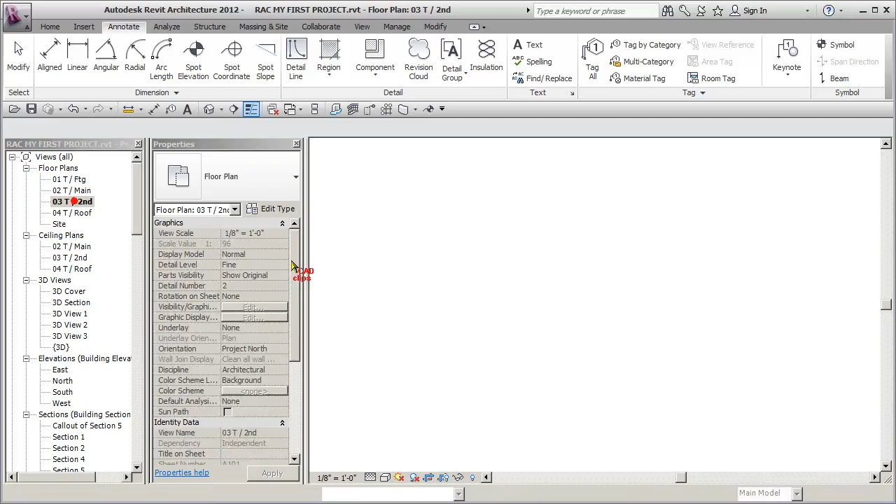So in the case of framing around the stairway, I think we're actually going to have decided to do the beams here in 3D. So I need to have a beam going across each direction. Let's look at our second floor. Okay, I'm going to pick on here and hide these categories. So I've decided that I do want to frame a beam across here and a beam across here, and then we'll have to put some posts in the wall.

Okay, so let's throw a beam in there, and if we don't get it at the right height, it's not a big deal. So on the second floor, let's go to our structure tab. Let's draw a beam, and let's pick a beam. We want a glulam 5.125 by 13 and a half. That looks good. Click. And now we're going to say, no, we're not going to place it at level 3. We're going to place it right at level 2.

And then I'm going to offset it a little bit later. But for the time being, I'm just going to place it from here to here. And it's going to tell me that I can't see it. That's perfectly fine. And then I'm going to do another one right here. I'm just going to eyeball it, get it close to here. Again, I'm going to get a warning. Escape, escape. So I can pick on this section, which is here for design purposes.

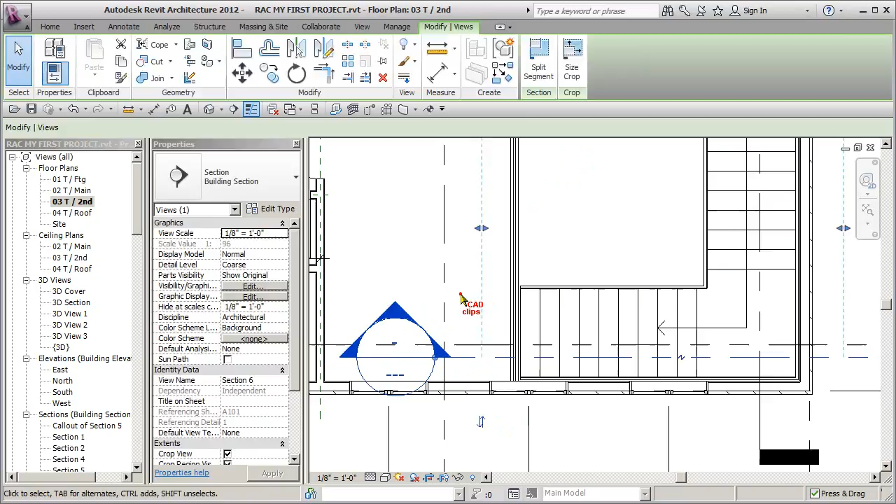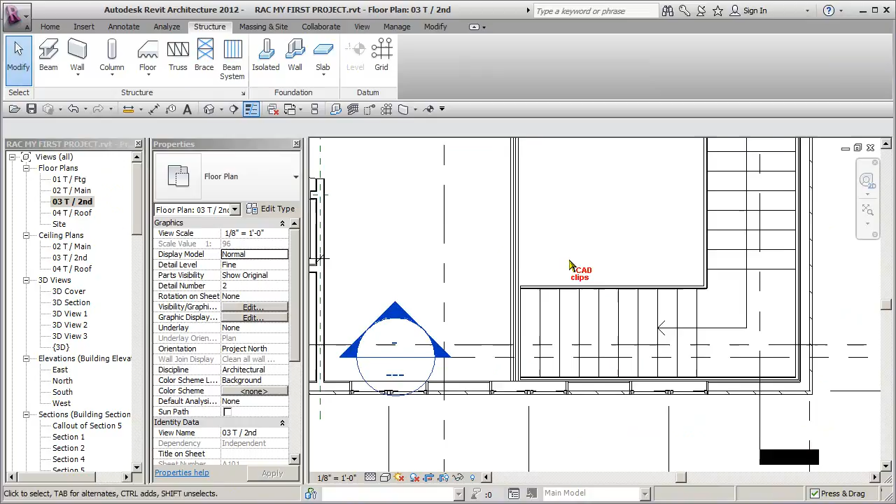Double click. I'm going to go into that view. I'm going to make sure I set my detail level to be fine. And there's the beam I just drew. Now, why did it go in at the second floor? It says it is on the second floor with no offset, and yet it's on the main floor. Okay, that's funny. Let's go to our second floor. Let's do a section. Let's look at this section over here.

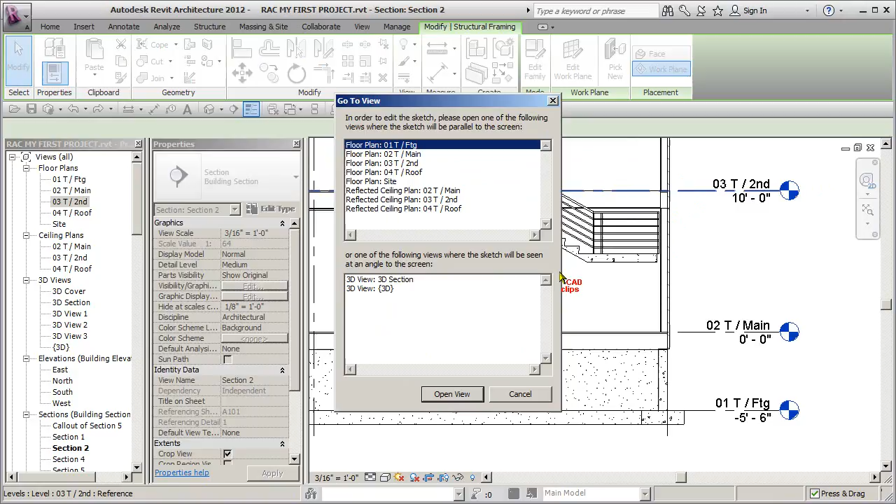Okay, there's our beam. Now this beam is at top of main work plane. Okay, so that shouldn't be on top of main. It should be, let's say, pick new work plane. And then pick a plane, hit OK, and then pick up here. Pick. That's not what I want. Cancel. Pick this beam. Edit work plane, not pick new host. Pick a plane, hit OK. Pick. There it goes. Now I'm gonna undo that back because I want to see what happened.

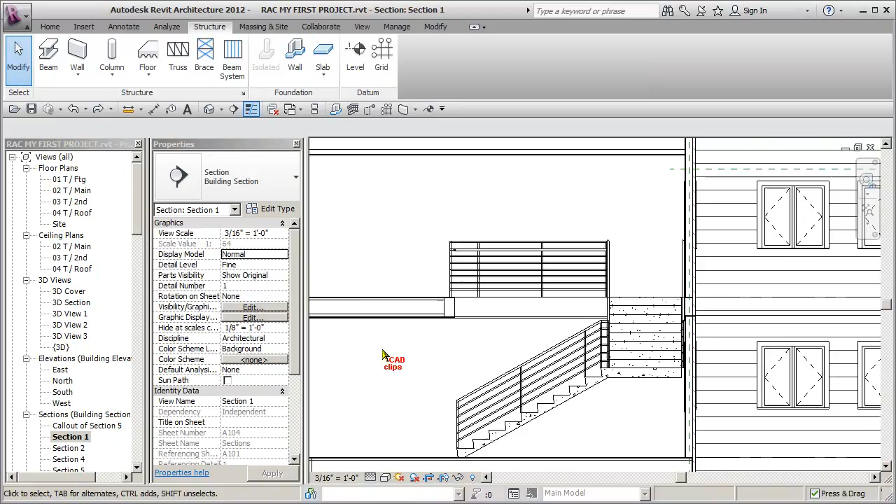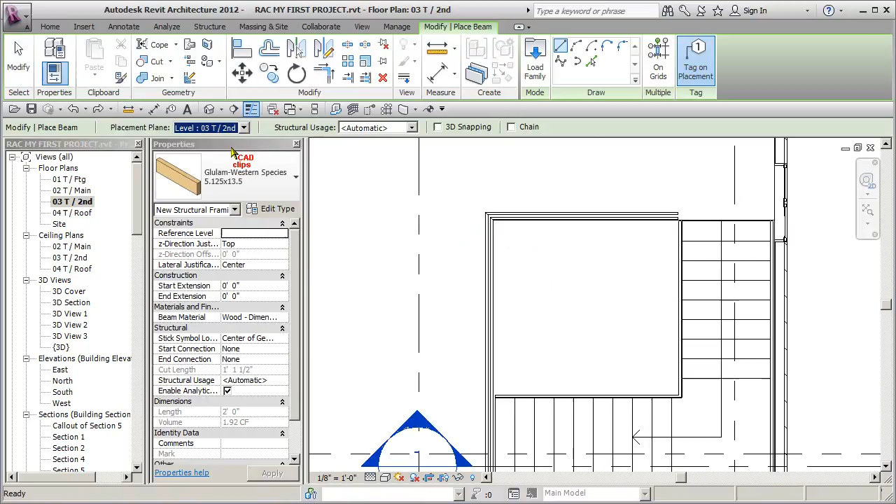Okay, let's get rid of this one. And let's go to my other section on the main floor. Make sure both of those are gone. And they're gone. Okay, let's try this again here. Second floor. Beam. You see there's my problem there. It should be top of second floor. Pick my beam type and let's try this again.

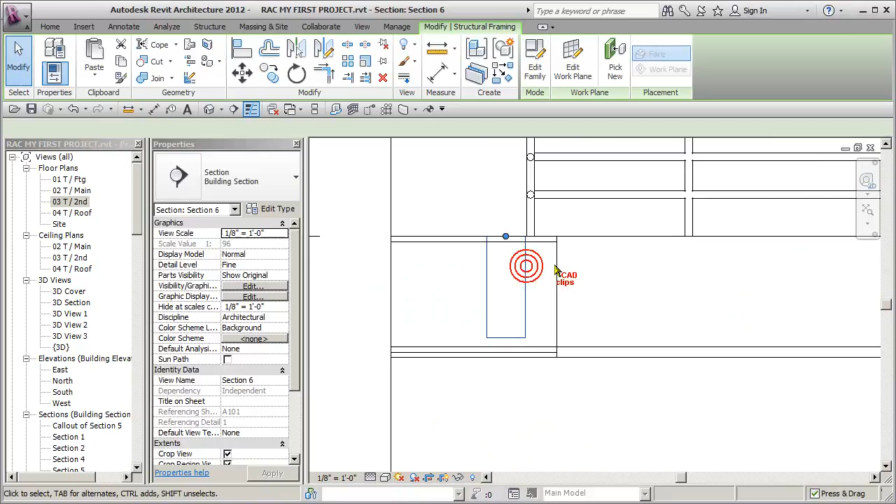It's still going to give me the warning. Click, which is fine, and click somewhere over there. We're going to clean that up. Escape, escape. So now back to here. Click, click. Now it's at the right level. Okay. And I need to change my detail level to be fine again. So I need this to be minus 3/4 of an inch. So I'm going to pick on here, minus 0.75 of an inch, copy it to the clipboard with Control C, pick on here, Control V, drops that down.

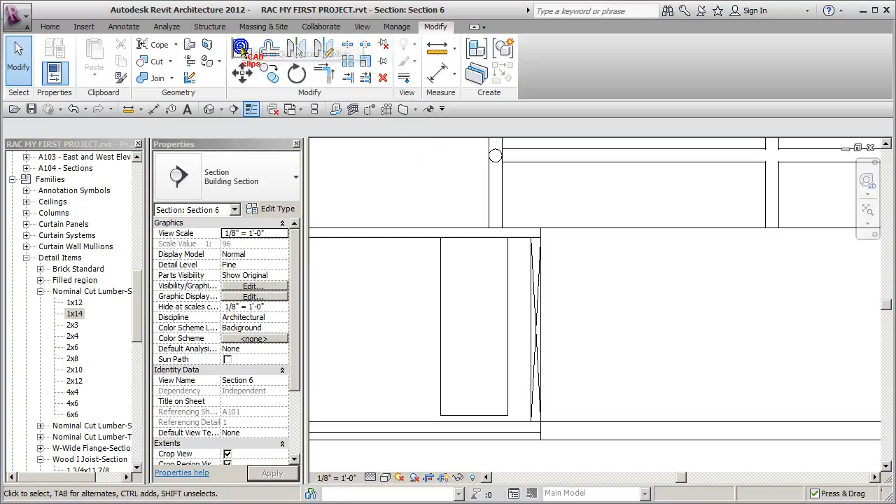Okay, now I want to align. I'm going to use my align. Have I not added that to my quick access toolbar? Modify, align to here, this guy. Okay, I might even bring it back. Let's take this, nudge it over. Let's go down to our detailing here and let's add in my 1x14, spacebar to rotate in there, escape, escape, and now I'm going to say add to quick access toolbar. There's my align to here, this guy. Okay, I can shim that space or whatever I want. So there's my beam in that direction.

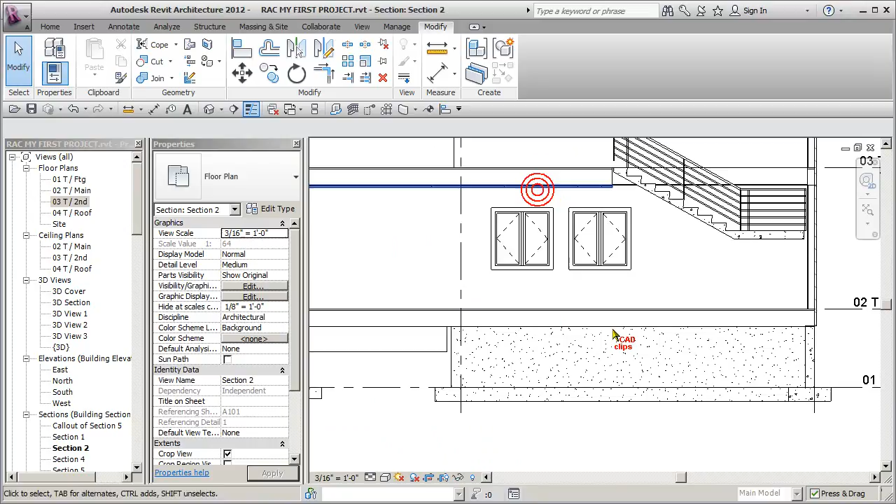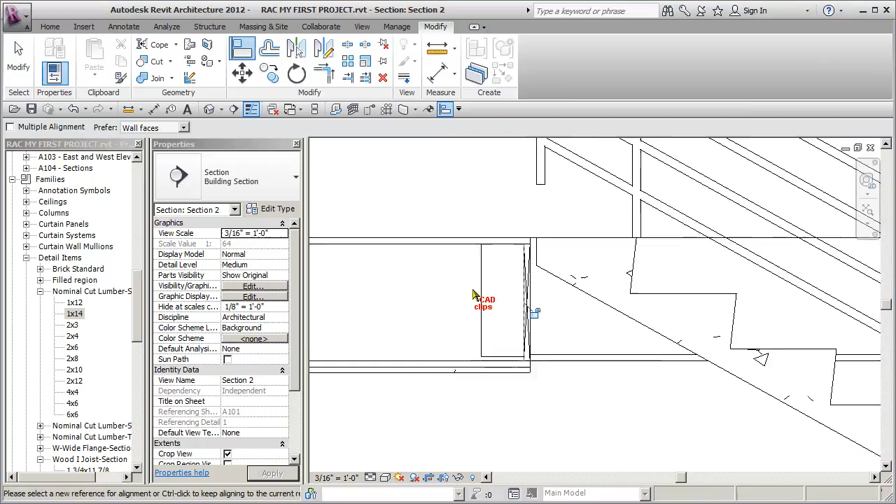Okay, let's go back to my second floor and let's look at this section. There it is. Same thing. Click on here. Control V pastes that. Control V, paste it. Okay, go get my 1x14. This is kind of the fun stuff, the detailing, because you just kind of get in and add the detail components, align. Although this beam right here is not a detail component. Again, TL for thin lines. Okay, that's what's making those lines nice and thin. So that's not too bad. So we'll add in the detailing and the cross-sectioning of that.

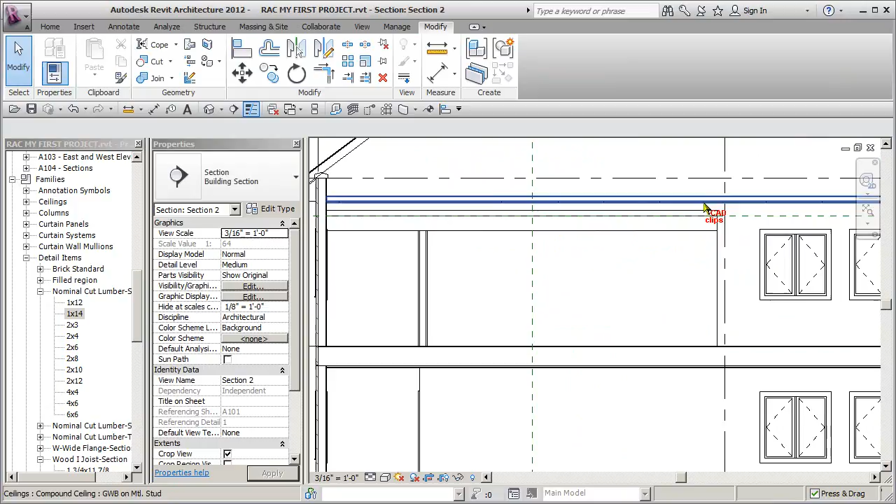That's just the bulkhead below. I can get rid of this dimension. So that's the bulkhead beyond there, and there's my ceiling. And that's not too bad. So now what about where those two beams kind of intersect? How do I clean up to make sure they're doing okay?

So let's go back to our second floor. And what I'm going to do here is drop my cut plane down inside the floor system. I'm going to go into here, view range. I'm going to drop my cut plane to be -1 foot. Hit apply. Oh, that can't be lower than this, and this can't be lower than this. So all three of those have to go down. Click out, hit OK. Now I'm in the middle of the floor.

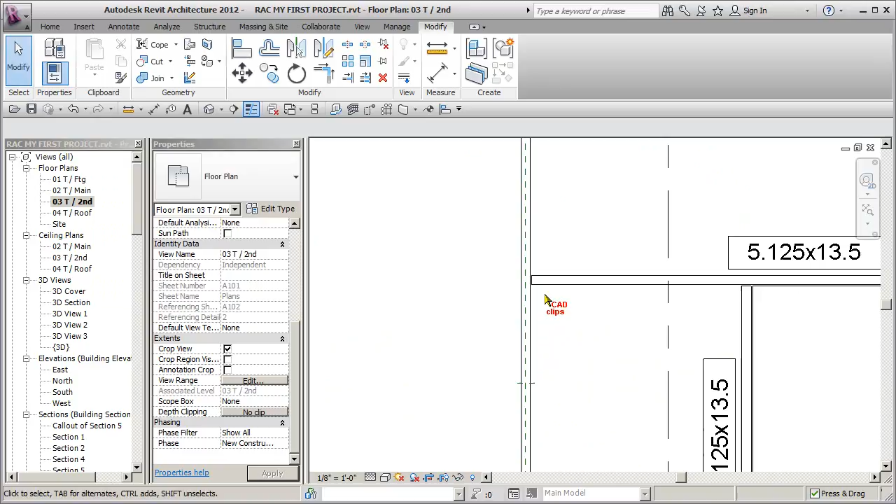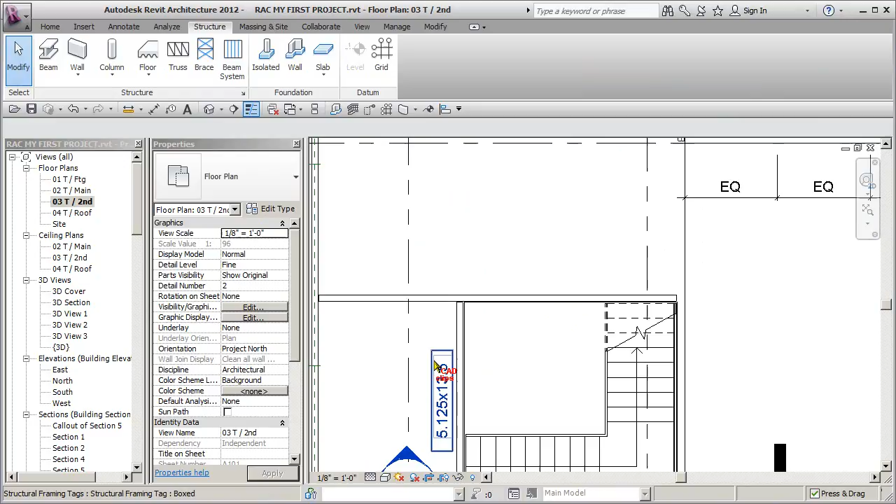Okay, this guy is talking to that beam. This one's talking to that wall. And this guy is talking to this guy. So it naturally snapped to it. It also tagged it automatically, because when you go into structure, if you say beam, it says tag on placement. If you take that off, it won't actually go in and tag that for you. So I can take those tags off or leave them on.

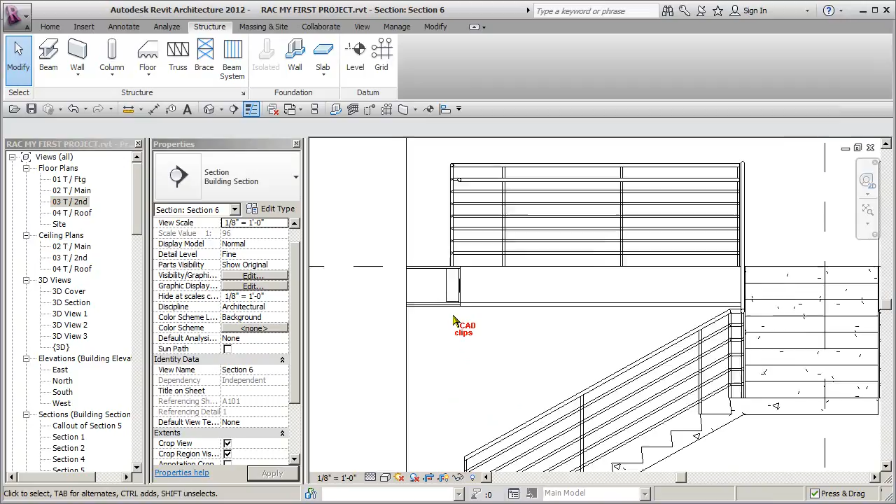And now I'm going to take my cut plane and move it back up to be my 4 feet. So this is back to 4, this is back to 0, and this is back to 0. We could also go in and right click and say duplicate the view and make a new view and leave it that way, and that way it's easier instead of operating it both from the same view. So now in my section over here, I now have my beam in there, so we can continue on our detailing.

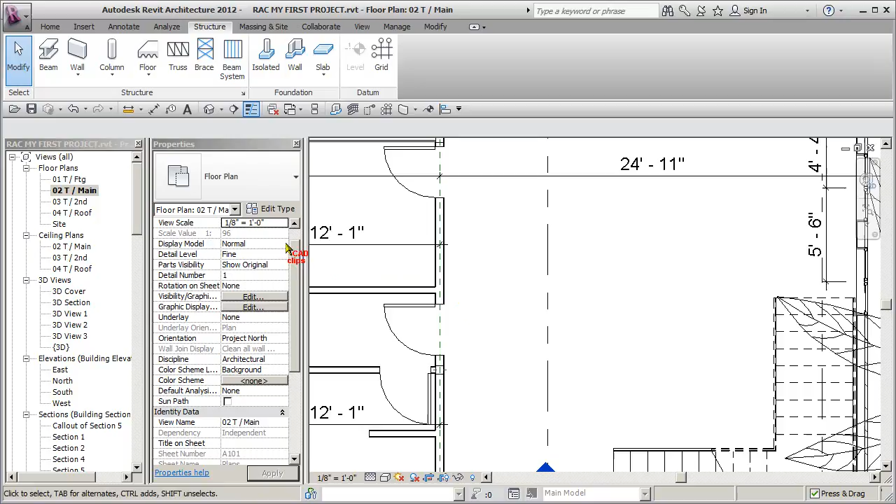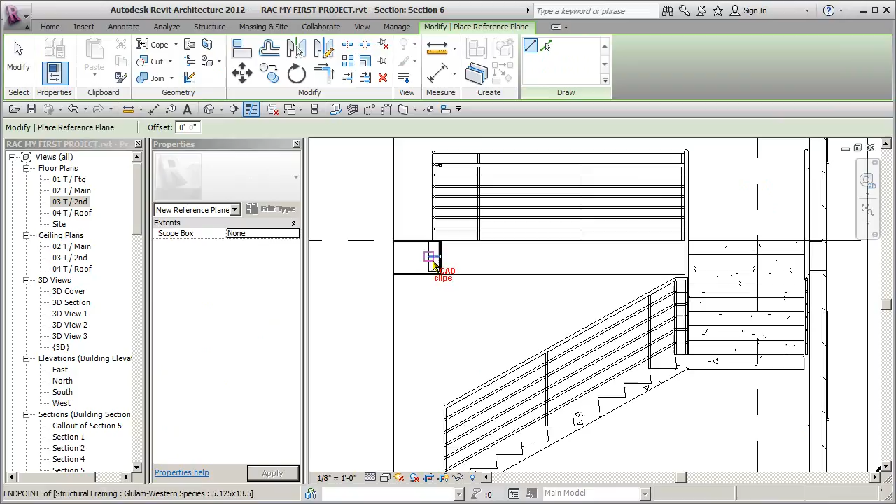So now what about columns? Let's have a quick look before we go back. Main floor. Okay, so main floor, we need to have a post, and I'm wondering if that comes in above a window or something like that. What we need is a reference plane. Okay, let's go back to that second floor. Let's drop that clip plane, unfortunately, back to be 1 so we can see it. Actually, no, here's a better way. Let's double click on here. Let's draw the reference plane in here. Home, reference plane. Snap to the center of that. Go up, escape, escape. Pick on here, grab that reference plane, pull it down.

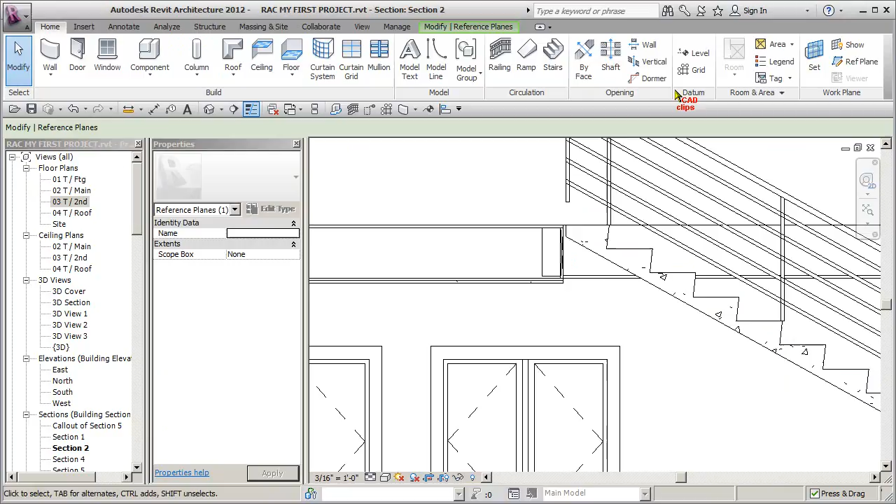Good. Now, go to your other section. Over here, go to this section, click, click, zoom in. Okay, and that way I'll know where to put the column in. Reference plane, pick on here. If you want it to extend to the roof plan, then you need to stretch it up so it intersects the roof plane. Hover over, click, tab if you have to. You don't have to use your shift key because you can only stretch them straight.

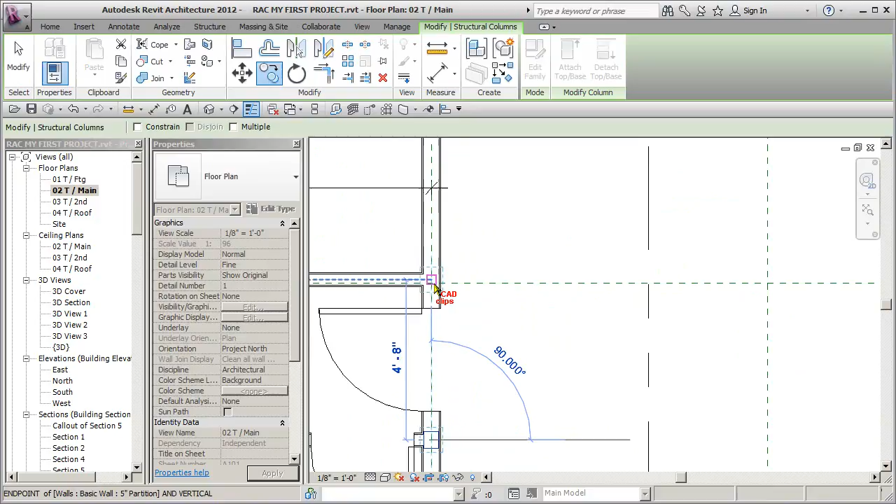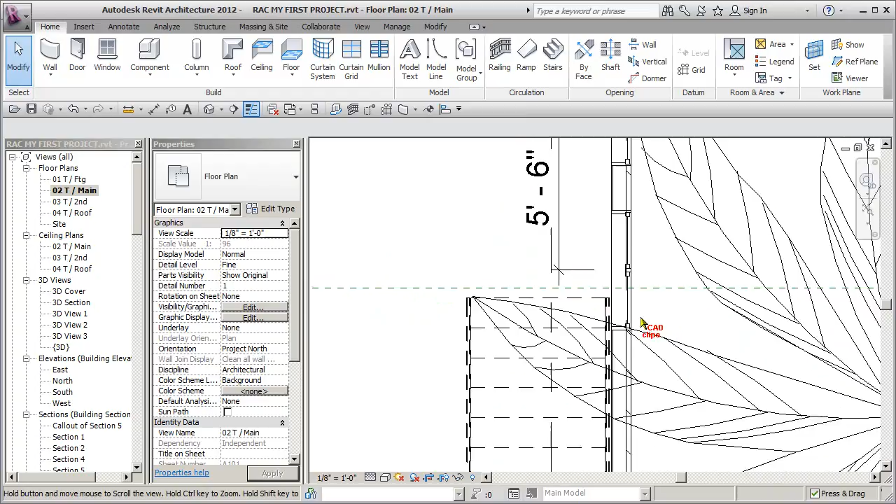Okay, now when I go to my main floor, guess what? There we go. So I can take this column and say copy from here to here. Oh, that's no good. Let's align this. Okay. Now I have a beam running under there anyway, picking up the joist. So then that's just going to be a point load. I don't know. Do I need a post under there or not? Maybe I do.

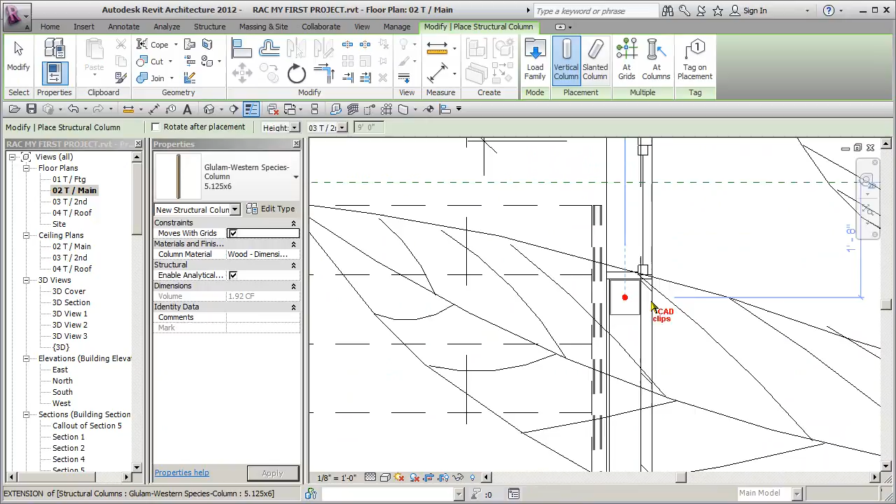Over here, are we in the middle of a window? We are in the middle of a window, so we're going to have to put a header in there and transfer that over to a couple of posts. So we could end up taking this post and say create similar, and inevitably we'll end up with a post on each side of these windows here. Okay, and that's on a load-bearing wall.

And we could put a detail line in here saying header over window, etc., because that's carrying not really a lot of load, because the joists are spanning this way, and there's your transfer point there, and that's being distributed across from there to there and then down these windows. So because the joist span is going this way instead of this way, there's not a whole lot of load going in there. But we've got those columns, and now we have our beams in there.

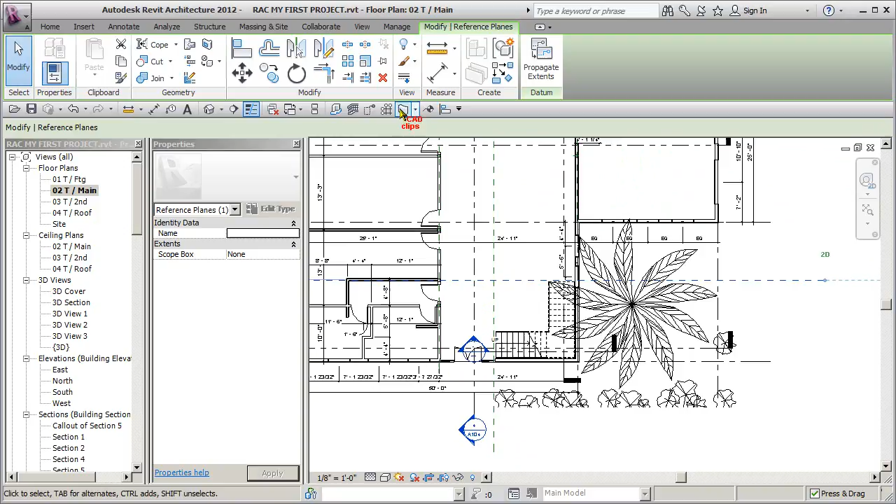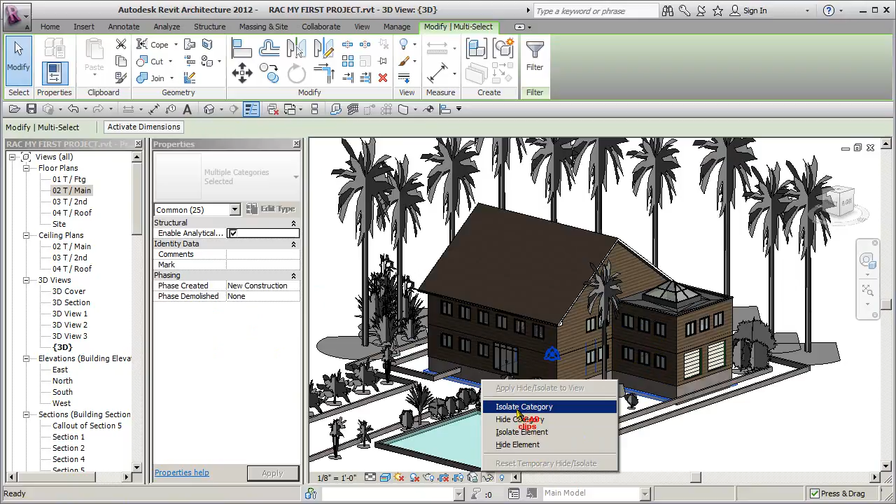So let's just go back to our good old 3D view. And let's try this. Let's grab everything, filter, take it all off, and say structural framing only. Structural columns, structural foundation, structural framing. Boom. And then we can go to here and say temporarily isolate these categories. Boom. Click out. There you go.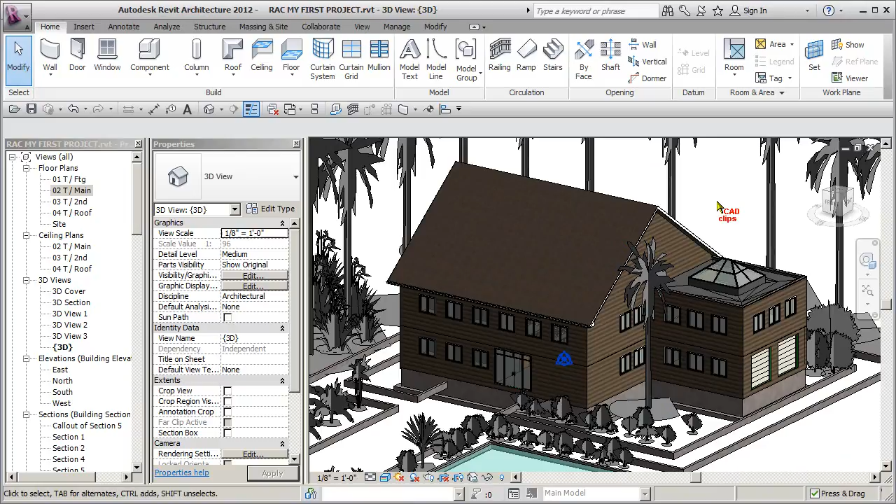So at this point, other than the load-bearing walls on the outside, this is our structural framing. Looks pretty good. And we can go back here and say reset and back to normal. So that's our stairway framed in.